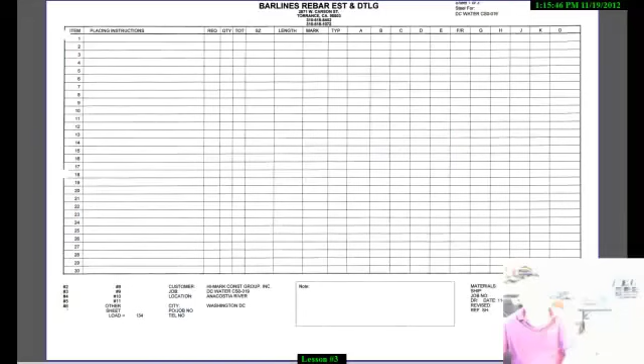We're now ready to go on to hands-on rebar detailing. Here is a detailing form that we used to use 40 years ago, before the advent of personal computers. All our detailing was done manually. We will write the descriptive items here, line by line. We will have columns for quantity, sizes, lengths, mark, type of bend, and then the dimensions A, B, C, D, and on and on.

We practically invented all the terms that you see now, like EF, each face, near face. When we're facing a wall with a two-curtain wall, the vertical bars closest to us we call vertical bars near face, and the vertical bars away from us on the back side we call vertical bars far face.

So we invented most of those terms, and as I go on and teach you and demonstrate how I do rebar detailing a long time ago, I will slowly describe what those terms we invented mean. So our style is descriptive.

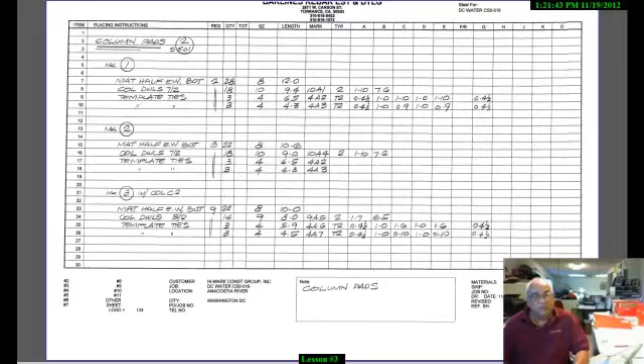Mark 1, the mat rebar, the column dowels, and the template. And he already knows how to install them, how to put the rebar cage on the column dowels. 7-2, 7 bars on the north and south face of the column, 2 on the east and west face. So by doing that, I don't need to make a drawing. That's it. So this is how we make use of this form sheet.

The detailers and the iron workers understand each other based on certain terms that both of us agreed on. Our joint collaboration practically invented those terms. The detailers and iron workers greatly utilize the contract drawing as their placing drawing. The detailer very seldom draws a placing drawing. If it's not covered on the contract drawings, that is about the only time a detailer will make a sketch.

As you learn to use Shear 97 detailing software, you will find similarities between this form and Shear 97. Most of the detailing software are based on this form. This is how it all began.

Doing detailing a long time ago, before computers, before calculators, handheld calculators, we used to use slide rule. And we learned, because we're dealing in imperial, we learned to calculate everything in decimal of a foot. We practically memorized the equivalent decimal of a foot.

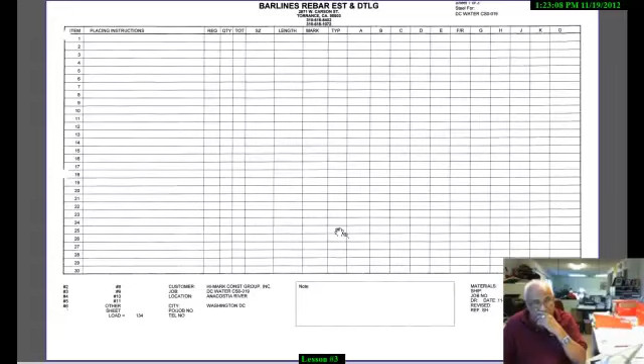1 inch, we already know, is 0.08. 2 inch is 0.17. 3 inch is 0.25. So if I'm adding 3 inches, I add 0.25 plus 0.25, it comes up with 0.5, which is 6 inches. See, all the rebar detailers memorize this in their head.

Now that we're using calculators, I still use this method immediately, rather than say 6 inch plus 6 inch divided by 12 to get the foot. Just by adding, using the decimal equivalent of a foot, I got my answer right away. So these are some of the things we invented then.

And now, showing this to you, we're going to go through the detailing of a foundation. But before we do that, I also like to show you my preparations when I begin a job.

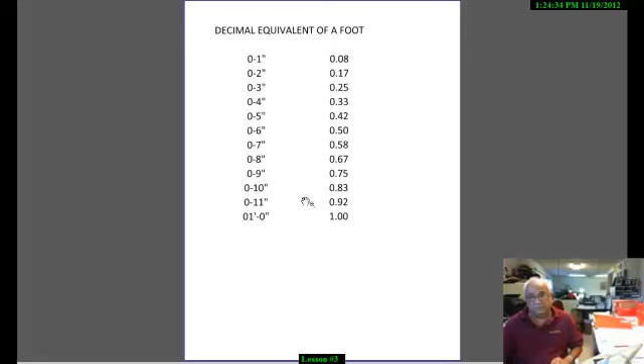This is a set of contract drawings. This particular job is the March Air Force Base Control Tower. When I begin my work, first I study the scope of work. I read through that, I read through the specs, and I determine whether the job is FOB or installed. Then I read the drawings completely from page to page. I go through it one by one.

Until I can build it in my head. I imagine building it in my head. I begin like I'm building it, from the very bottom of the structure, slowly going up and up until I practically build the whole thing. And as I'm picturing it, where the walls are, where all the foundations are - is there going to be a concrete wall? Is there going to be a masonry wall? Is the roof concrete, or is anything concrete? Is the floor concrete? Is it slab on metal decks?

I picture all that. I go to the architectural drawings, the mechanical drawings, plumbing, electrical. Are there any holes in the mechanical that will affect my rebar detailing? Suppose a pipe goes through a wall - what happens to my vertical? Do I need trim bars and all that?

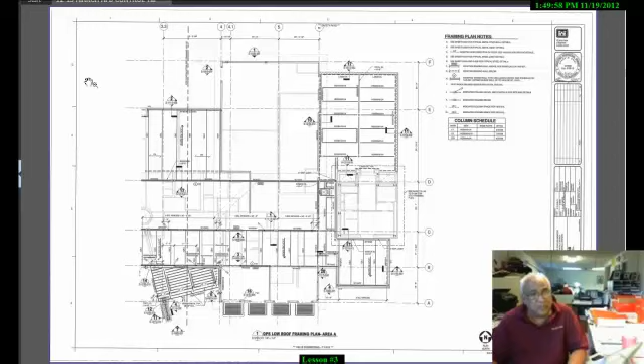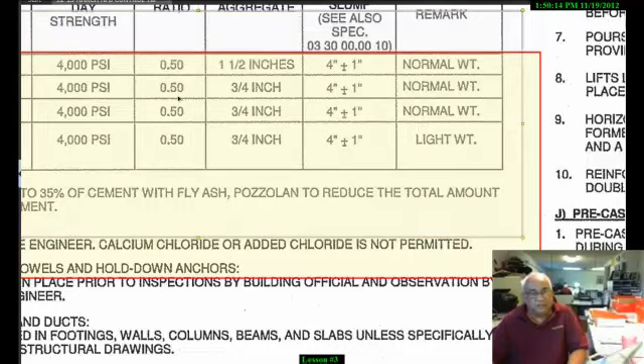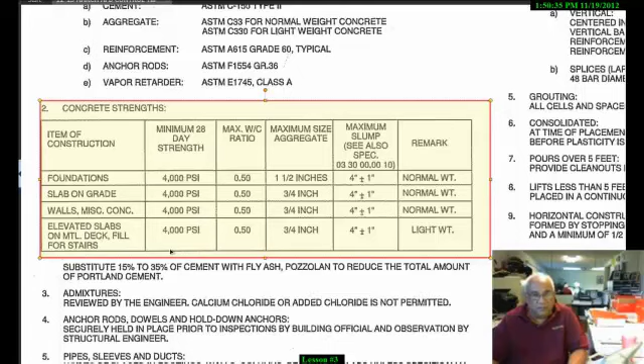So once I got this in my head and I want to go to the details itself, I check on the following: I check on concrete specs. What are the concrete specs on this job? I see it, they're saying in this job - okay, let's look it up - and it's saying the foundation is 4,000 psi, the slab on grade is 4,000 psi, walls are 4,000 psi, and the slab on metal decks are 4,000 psi. So I've only got one strength, 4,000 psi.

I need the strength to determine my lap splices, because lap splices are a factor of the strength of the concrete also. Then I look at, is it all normal weight? Because if it's lightweight, then I have to apply a certain factor to the splices.

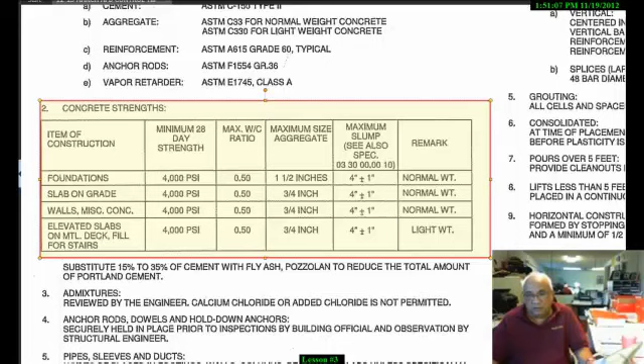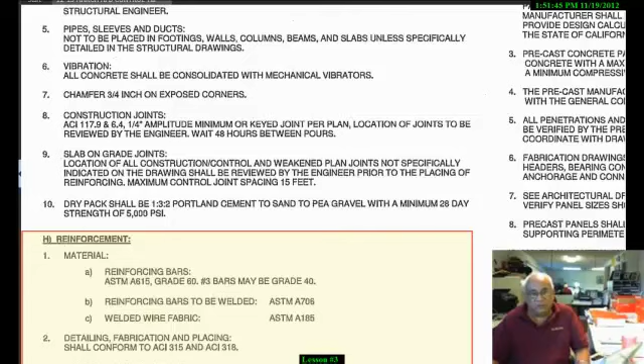Then I check the ASTM specs. You remember the ASTM specs? It's important, we need to know what the spec is. So I look and read through the general notes until I find them. In here it's saying material, reinforcing bars, ASTM A615, grade 60, and it's saying number 3 bars may be grade 40. So if I like to, I'll say okay, all the number 3s are grade 40, the rest are grade 60. If the bars are going to be welded, they want A706. The welded wire fabric is a standard, ASTM A185. And they're saying detailing, fabrication, and placing shall be according to ACI 315 and 318.

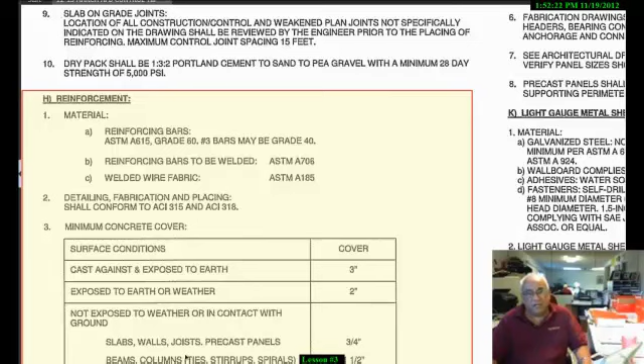I look, and then I check on protection - concrete clearances. Cast against or exposed to earth, 3 inches. In other words, all my foundation, if the rebar is going to be laid on earth, I have to be away from dirt 3 inches. If it's going to be exposed to weather - it's formed, but once they remove the form, it's exposed to weather - it has to have a clearance of 2 inches. Not exposed to weather, for example underneath the slab, or inside of a wall, inside base of a wall, 3/4 inch.

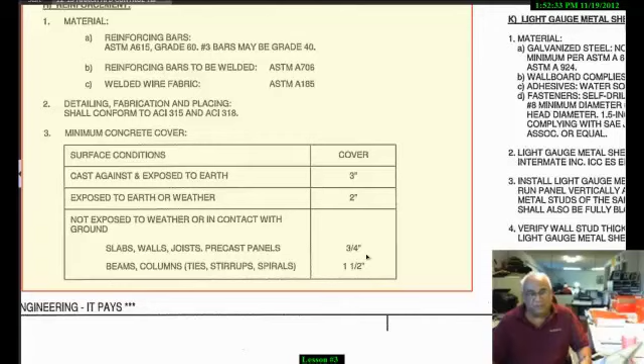Beams and columns, to the stirrups, not to the main steel, but to the stirrup or ties. It's 1.5 inches. See, these are what I need to do, and as I gather them, I copy them in a piece of paper.

All this information, I tape in front of me in my detailing station. That's why our detailing station has 3 side walls - you have walls so you could stick these items in, so you don't need to flip to the drawings, you look in front of you. Every time you're detailing, get a piece of paper and put the name of the job, and here are all the items I need. That way it's easy for you to look at.

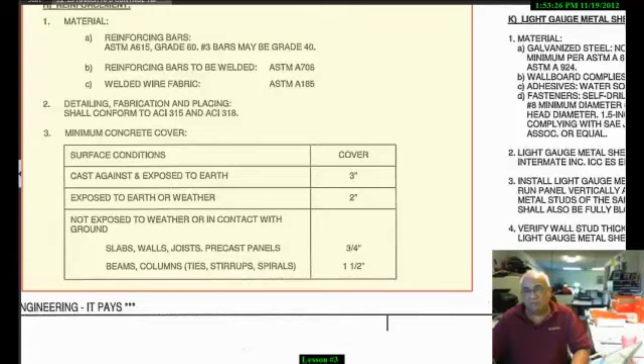Okay, so I go through all the motion of all this until I get all the information I need. I check whether there's rust protection - are the rebars going to be epoxy coated or galvanized? And I check the lap schedule, see if there's a lap schedule. If there's a lap schedule, I copy that lap schedule. And I look for other requirements for laps.

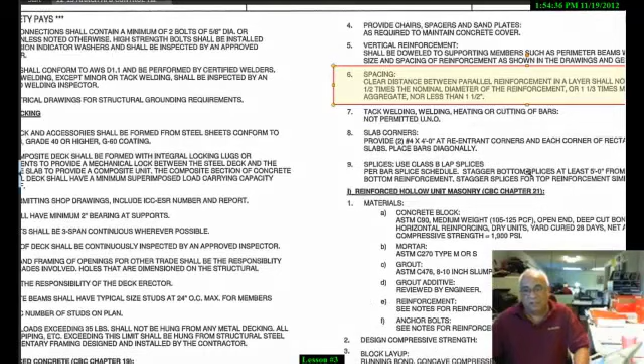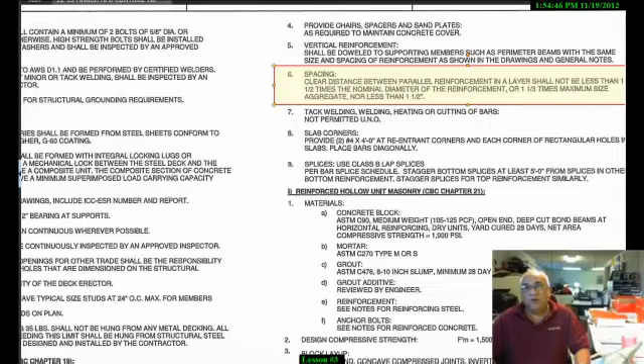Like in this case, there is a special requirement for lap. Let's see what this is, let me enlarge it. It's got this special note. It says spacing, clear distance between parallel reinforcement in a layer shall not be less than 1.5 times the nominal diameter. So it's got that thing.

Splices, like this one. Splices, let's highlight this. Splices, you have to use Class B lap splices. Lap splices per bar splice schedule, stagger bottom splices. So there's a requirement of staggering them.

You cannot have splices all at the same point, so you have to stagger them. So if you have a series of bars, make sure your last bar and your beginning bar are not the same. This way they could stagger them by flipping the ends on each side. You could stagger a series of bars by alternating ends - you put one end on one side, and next time you put that side on the other end. But make sure the end bars are not the same. If you make them the same, they won't be able to stagger anything.

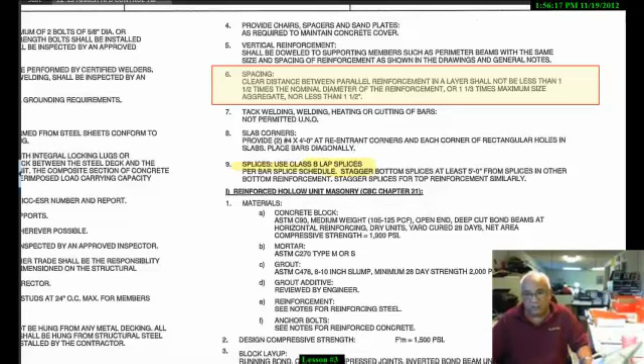Concrete block, I check it out and I see. I look for something like open or close end blocks, and I will explain this later on when we're doing the masonry wall detailing. So anything that is pertinent to my detailing, I gather them, I put them in a piece of paper, and I put them on the board, on the walls next around me, facing me, most of them. This is how I do my preparations.

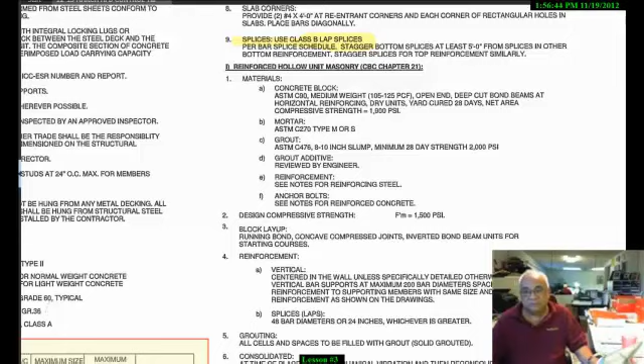The lap splice schedule on this particular job shows 2 categories: top splice and other splice. The top only pertains to horizontal bars, not vertical bars, just horizontal bars with 12 inches of concrete underneath it. Others apply to vertical bars and also horizontal bars that doesn't have 12 inches of concrete underneath the bar. So that's the difference. A detailer should know this very clearly.

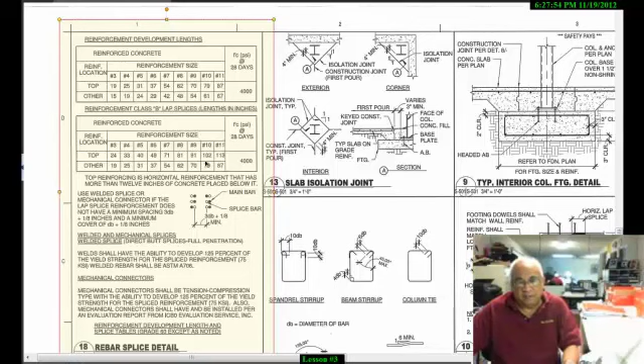We are now into the specifics of detailing foundations. We begin, of course, with the first item of foundation, usually the deepest concrete. It is usually the drilled piers or caissons if they are present in the job. Then you climb up one item at a time into column pads or pile caps, then into grade beams or tie beams, and sometimes you have to go into a mat foundation. All of these are foundation work. Slab on grade is part and parcel of the foundation work also. So we begin with the caissons, and I will demonstrate to you the way I used to do caissons using the manual descriptive detailing style that we used to do 40 years ago.

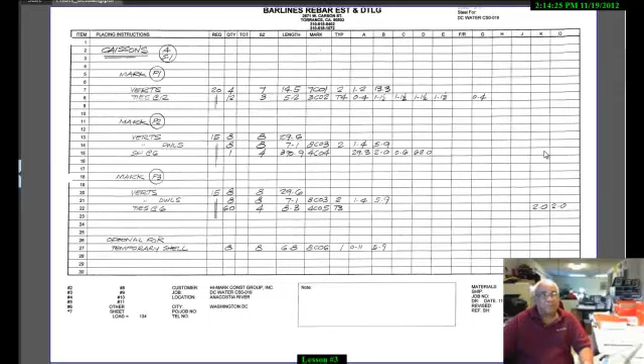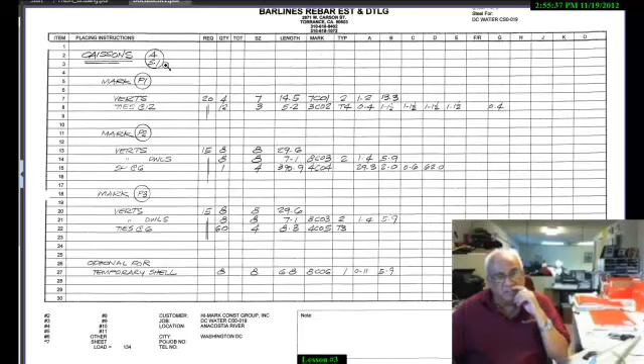Here's how I used to do caissons 40 years ago using descriptive detailing on a form sheet like this. Everything is done manually. I reference the detail on the caissons using the contract drawings, in this case A-S1, that's the actual contract drawings.

And I use the same markings on those caissons or drilled piers, P1, P2, P3. If I have a series of P1 and some are different than others, I will distinguish them by putting a subscript, P1A, P1B, P1C. But they're all still P1 based on the contract drawings. I will never change the markings on the contract drawings - that will just confuse everybody. So I will use the same marking. Mine might have a subscript, however, might have P1A, P1B, or P2, P2A, and so on.

In caissons, the items are usually a vertical bar, maybe a vertical dowel, and ties, spirals, or hoops. Sometimes I will supplement my detailing with a drawing, but first and foremost, I finish all my detailing first. I gather all my P1, get all those items like lengths and all that, and I'll put verts, which means the vertical bars.

I have 20 of those P1s. I'll put 20, and underneath I will do a double line which denotes ditto, meaning this next line is also 20. I will put on a quantity. In this particular case there's only 4 vertical bars.

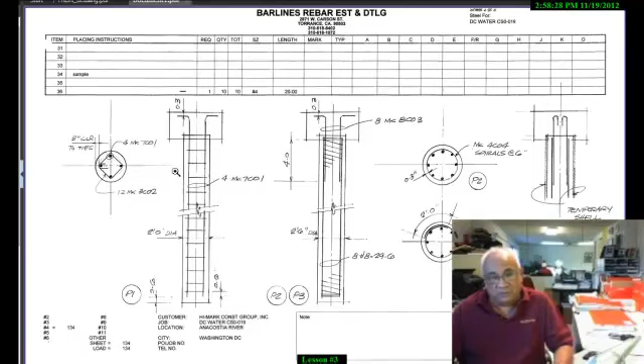But that's not what I use. I use a type T4. T4, if you look at your standard bend, is a diamond tie.

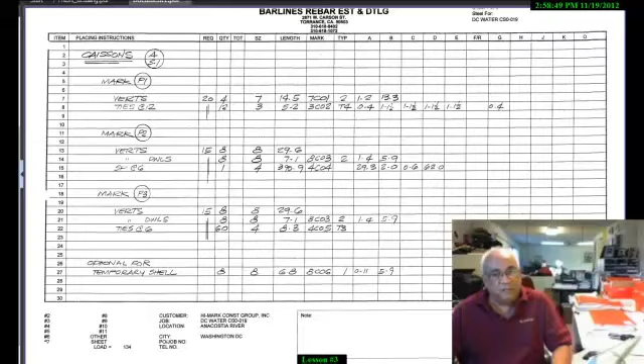T4 is a diamond. We use a diamond because we don't really know the BCDE. The BCDE is rounding up at the corner. It's not equivalent to the hypotenuse of the height and base. Sometimes detailers, because they know the height and base are the same, tend to assume it's a type T1 and they use the hypotenuse.

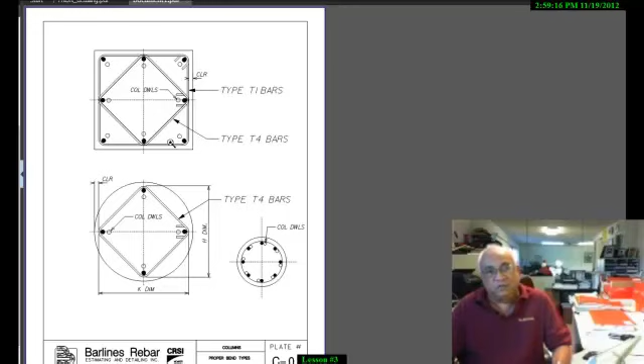Look what happens if you use the hypotenuse as your B, C, D dimension. If you happen to use that BCD dimension, which is the heavy lines inside, your clearance is 1.5 in this case. You see that point to this point - that would be your hypotenuse of this base and height. But you notice it's narrower than the actual BCD. The actual BCD, because it's rounding up at the corner, enlarges the bar, so the actual tie is about 2 bar diameters wider.

We had a detailer, a smart detailer from USD, who had several caissons, like something 30, with 4 number 8 bars vertical. He made a mistake using a type T1 for the ties, and because he's a smart kid, he right away said, 'Oh, I know the base, I know the height, I can use the hypotenuse.' So the BCD is the hypotenuse. It was too narrow - they weren't able to use it. We had to buy a new set of ties for all of those piles.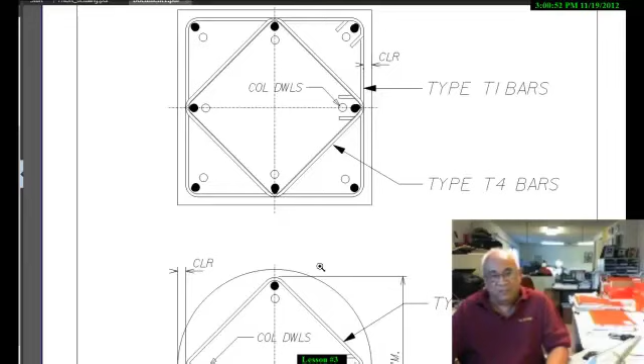Because it's not a type T1, it's actually a type T4. Remember that, it's a diamond tie. A diamond could be looking like a square, but there are occasions where if you use it on a rectangular column, a diamond would be looking like a diamond, not like a square.

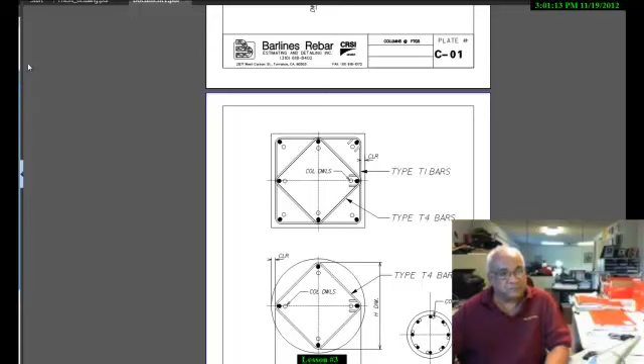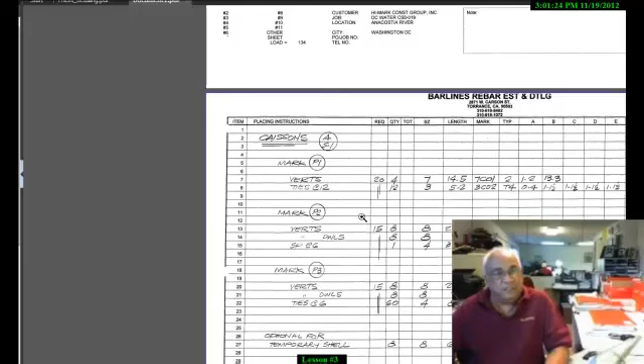So going back to my detailing, even then, I was smart enough to know that I could not use a type T1, I have to use a type T4. The other thing I recognized at that time is to make it easier for my iron workers, I need to show them where to begin those ties. I need to tell them exactly where to begin spacing. So on my drawing I said, begin the first tie 6 inches from the end of the vertical bar, and then spacing, and so on.

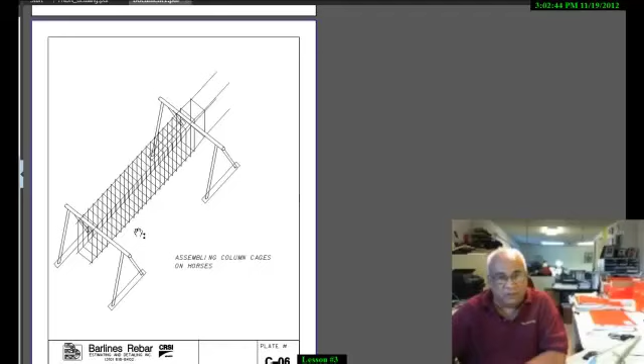I did this because I recognized that concrete is not available to them, and I should not be referencing the concrete, because like columns, caissons are built using horses like this. So they put the vertical bars on horses, and then they hang all the ties, and they insert some more vertical bars, and then they begin to tie all of them. They begin to assemble them into cages way out of the hole where it's going to be dropped. So in a certain part of the job site, guys are busy building them into cages. So do not be referencing concrete, because the concrete is nowhere in sight. Reference the end of the bar.

This is true on caissons and columns. It's built on horses. Okay, to continue on.

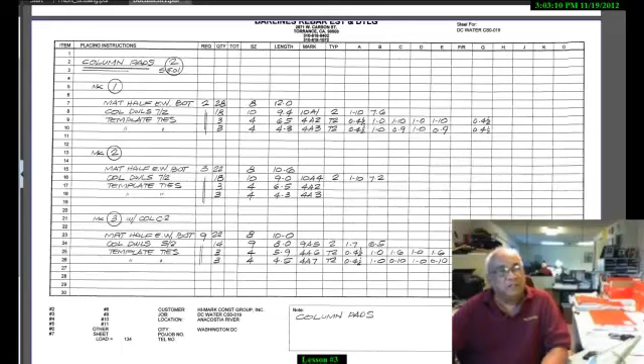Then I have type 2, that's column pad. I have a Mark P2 caisson. The vertical bar is number 8, 29'6", a straight bar, and at the top it's got a dowel, 8 number 8, 8CO3, type 2, 1.4 by 5.9. It's a dowel, like this. It's got a vertical bar and dowel at the top.

And then I have a spiral. A spiral is written a long time ago like this, and it's still written like this. But you now have some tools to help you, while before we didn't.

I put a bar mark on it. I use this sequence that is already available. I never start a sequence again just because I have a different size bar. If I do that, I'll have a hard time keeping track of where I am. By doing this, just going by sequence, 7CO1, CO2, CO3, 4CO4.

The first dimension I need, the A dimension, is the height of the spiral, from the bottom of the spiral to the top. The second dimension I need is the diameter of the spiral out to out, in this case 2 feet, because the caisson is 2'6", 3 inches clearance on each side gives me 2 feet. The third dimension I need is the pitch or spacing, 6 inches. The last dimension I need is not really a dimension but a count. It's the number of turns.

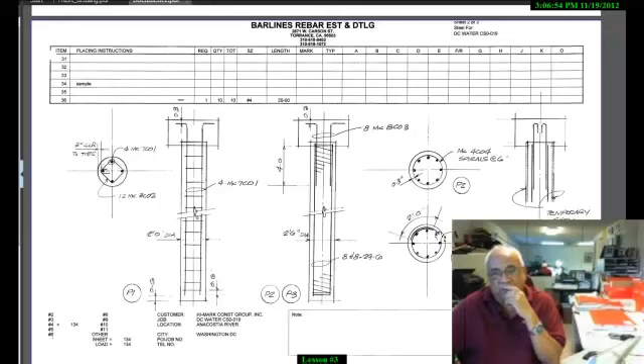Then I have Mark P3, which is the same thing, vertical bar and a dowel, but this time they're using hoops. The hoops is type T3, so hoops is just type 3. That's easy. The length is the circumference plus the lap, 2 feet. That would be the thing. And you get the number of bars by dividing the height by the spacing. That's how I come up with that.

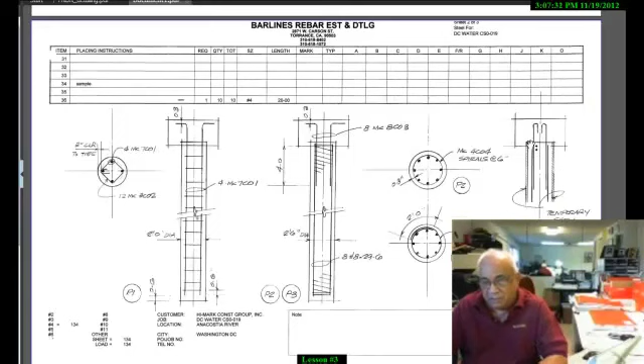Okay. When detailing caissons, keep a lookout for places where they may need to use temporary shells, temporary shells or casings. I think I made a drawing for that. Sometimes they put a temporary casing around the caissons to protect it from dirt caving into the concrete, caving into the hole.

Sometimes the dirt, that's why they have caissons, is very poor and loose. So if they do not have these temporary shell casings, then dirt could fall in and mix with the concrete or remove the holes they already dug, already drilled. In cases like that, make sure the dowels is not a 90-degree bend but a 180-degree bend inside, because these temporary casings are temporary. After the concrete is set, they remove it by pulling it up and using it over again. They use it over and over again.

Sometimes they may have only one casing for the entire job, or maybe 1, 2, or 3 casings. But they're reused, they're not left there in place. They don't need to. So because of that, make sure your bars at the top are bent inward rather than outward. That's the thing there.

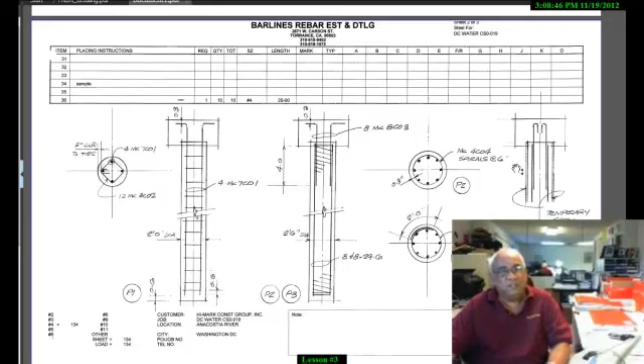One thing you will notice also, when I'm doing my detailing, I leave out the total. A long time ago, 40 years ago, we used to have what we call order writers.

We have a bunch of girls in a room, and we give them the order. The first thing they do is the multiplication, and their job is to make tags. The tags are done manually. They have several color tags, and they put on these tags.

Then they have a Friden machine, which is a manual machine, and they do the calculation to find out the weights. And they write the order on a bar list sheet, and that's what they send to the shop.

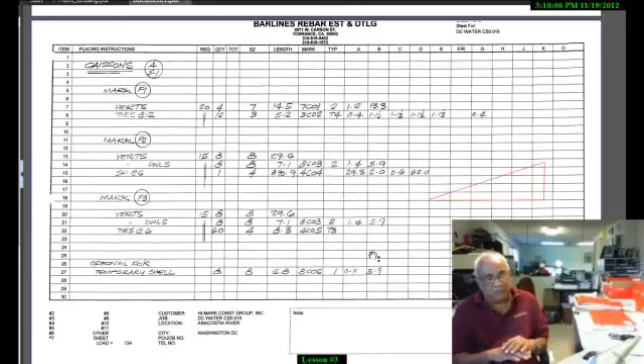So we have a bunch of order writers. The order writers now are gone. There are no order writers anymore, because as you're detailing it, you're creating a bar list, you get the dimension, and because it's a digital computer, the files that you create go to a machine. The machine will spit out the right number of tags, depending on how many pounds you want a bundle to be. This is all done automatically.

It's much safer now, much. The weights are accurately done. The girls sometimes made mistakes on the weight. That never happens now. But still, the format that you use will still need to be like this.

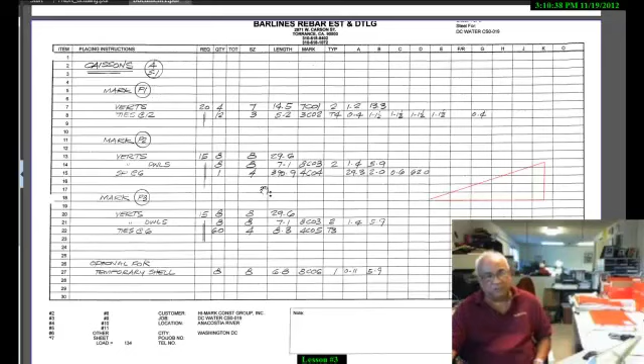You group them so that the iron worker will know exactly what set of bars he needs to collect and gather close to P1, what set of bars for P2, what set of bars for P3. You never mix them. And always your multiplier on sets, number of sets, has to be true to a set: 20 set, 15 set, 15. That way he knows immediately how many cages he's talking about.

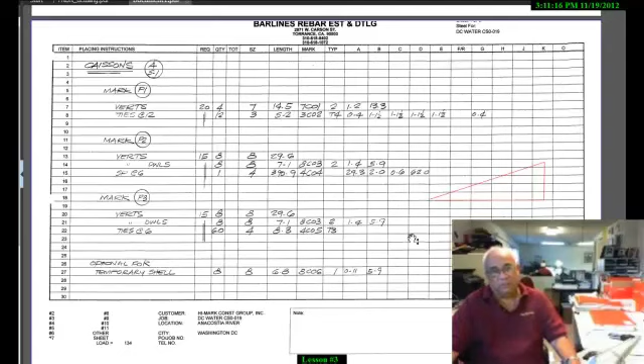In my case, because they still do not know which one is going to be a temporary shell, I prepare those dowels already. At the last minute, when they say P3 is going to have a temporary shell, I could immediately erase this and replace it with 8C06. That's how I do it. That's how we do caissons.

The next item I'm going to show you is how I do column pads, again based on the old style 40 years ago, same thing as the caisson. For column pads, I call out the section on the drawing, detail 2, in this case S5.01. It shows the detail of column pads. Column pads are pretty easy, and column pads and pile caps are somewhat similar. The only difference is most of the time pile caps have bars on top, but otherwise the detailing is fairly the same.

Let me call this out. I use the same marks as on the drawing that I have, and if I have a series of mark 1 with a slightly different configuration, I might add, just like on the caisson, a subscript like 1A, 1B, 1C, but I still maintain the bar marks from the drawing, like bar mark 1, bar mark 2. Changing the bar mark from the drawings will only confuse everyone.

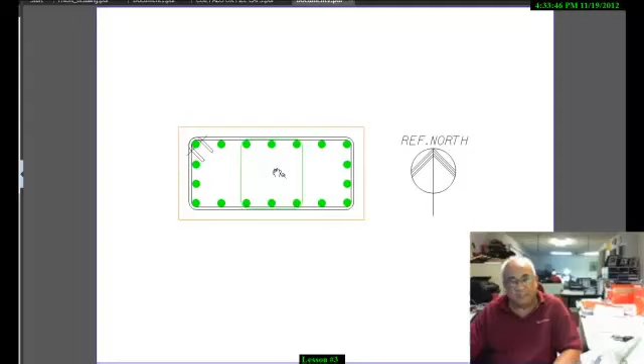The ties, the template ties I have, are one closed tie encompassing all the bars, and another intermediate tie to hold these 6 bars in a certain fixed location. It's a dowel, and I need these bars, the ties, to be a template tie.

Going back, I will have template ties. There's 3 template ties. They're all number 4. I usually use the same size bars as the actual tie. The template ties are usually not shown on the contract drawings. What is shown is the actual tie, and I will use the same size. And I'll have a type T2. The type shown on drawing will most likely be a type T1, but for template, I'll make it easier for the shop by using type T2.

Type T2 has 90-degree ears rather than 135-degree ears. 135-degree ears might get in the way of the dowels when they're so close together. A type T2 won't have that problem because it's 90-degree. So because it's just a template tie, I sometimes will use a type T2. I could use type T1, there's no problem with that, but I'm so used to helping the shop because T2 is easier to bend than the type T1s.

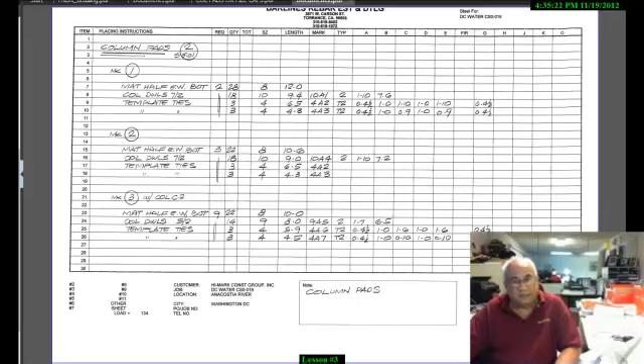And then my intermediate will be the same, but with different dimensions. A column pad is like this. You have a box, you have a mat, so many bars one way, so many bars the other way, and the column. These are columns.

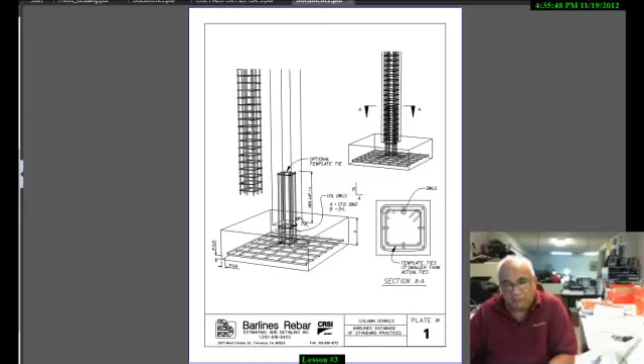The columns have to be set in such a way that it doesn't interfere with the actual column cages as it's being hoisted down into the top of the concrete. So the configuration of the dowels are like this. They're set inside in a concentric manner from the actual position of the vertical bars.

It's inside, and a template tie is used to hold it in place. Without a template tie, the ironworker will have a hard time placing those bars. The template tie, one at the bottom, one immediately below the top of the concrete, and another one to hold the top. This top one sometimes is taken out before they hoist the column verticals. If you have those template ties at the top, you won't be able to hoist it down because the ears of the ties will get in the way.

So here the template ties have 135-degree hooks. I could make them T2 by making them 90. The dimension of the template tie is based on the distance of these corner bars. The corner bars, all the bars are made the same way.

You notice that the corner bars have more H dimension, which is the offset dimension if you're detailing the column, than the inside ones. The inside one has only a very short H dimension, while here it's a long H dimension. So when I'm detailing this, I use this and then I lay out my template tie.

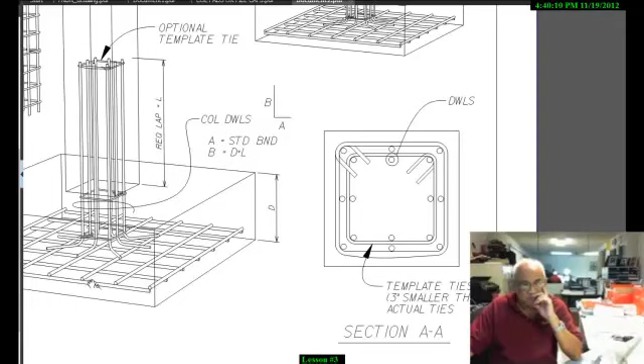And again, the spacing of the bars is from the Manual of Standard Practice. I use that, if you remember. And this is how it shows. You could send 2 template ties or you could send 3. I have a habit of sending 3 because I know 2 will be inside the concrete and 1 will be outside, and that outside one is thrown away.

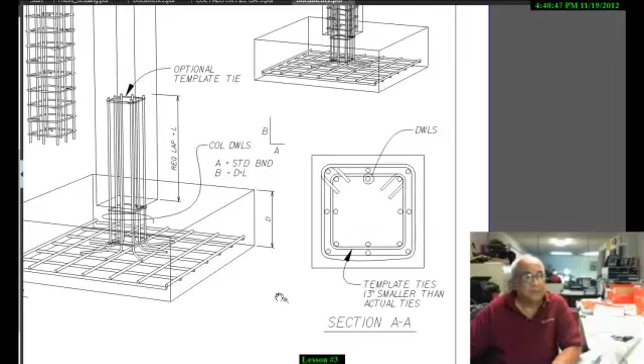The clearance of the template tie is just like so. You have enough space between vertical bars and vertical bars, and that would be the proper size of your template. So column pads are easy.

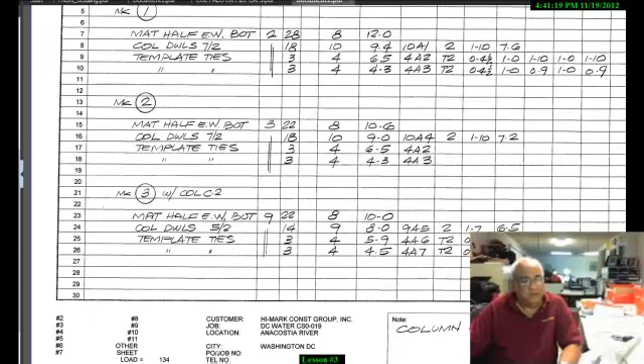Pile caps are somewhat the same. On mark number 2 pads, I have the same thing, mat half each way, the dowels, and then I say also 7-2, 5-2, which means 5 on the north and south face, 2 intermediate, and this is it. So about the only thing you need to know about column pads is you need column dowels and the template tie. When this is a pile cap with the top layer of mat reinforcing, do not forget to use standee to support the top mat.

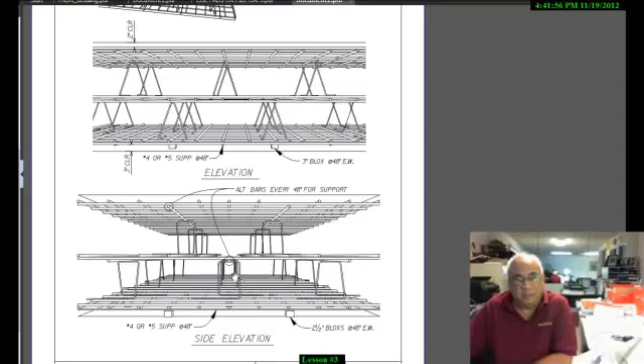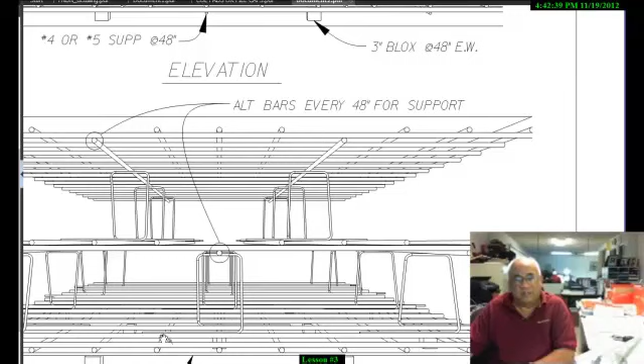You should have enough dimension here for bars to be tied to. If you round it up, the bars might fall off, so you need to have a little bit of a straight edge. Make sure the base of your standee is enough to go over 2 transverse bars. If you only had it one, it will fall off. It has to be laid on top of 2 bars—2 bars here, 2 bars on that leg, and 2 bars on this leg.

This is a type 25. There's another type, but this is most common for column pads.

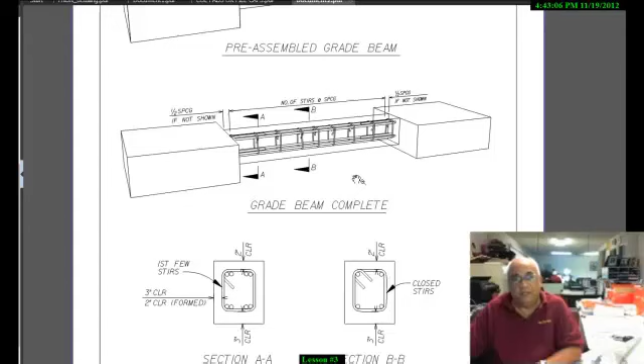If the column pads have tie beams that will be later poured in between them, do not forget to include the dowels. Remember, all bars belonging to the column pad when it's poured has to be included with the column pad. You cannot detail these dowels with the tie beam because the column pad will be poured first. Whoever gets poured first, anything inside it must belong to it. So when you're detailing the column pad, you have the mat, you have the dowels, and you have the dowels also for the tie beams.

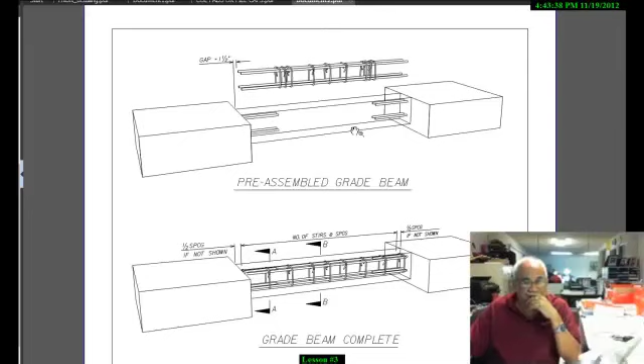Do not forget the tie beams. Do not detail them separately—they have to be detailed together. So here, if I had that condition, I will have another line that says tie beam dowels. That's for this.

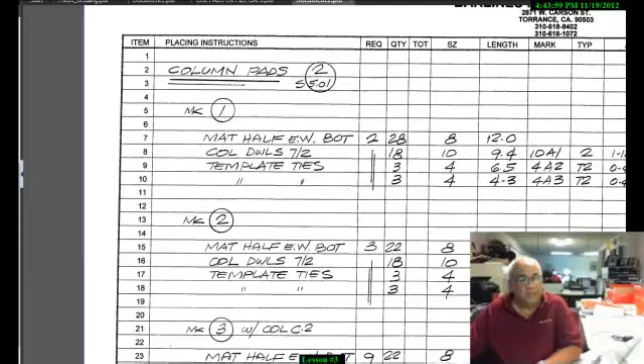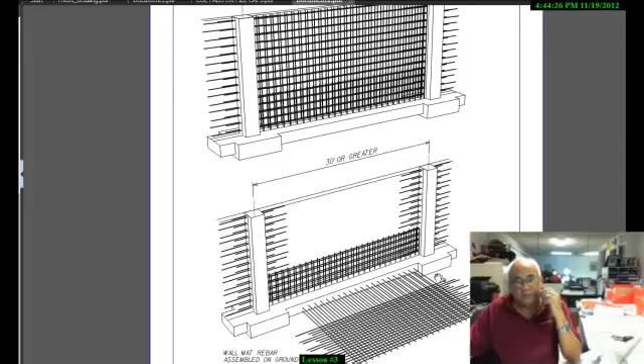The other thing, if you're detailing column pads, and there are column pads, you're detailing column pads—that's all you're detailing, column pads. The column pads are usually thicker than continuous footings. The continuous footings are usually shallower.

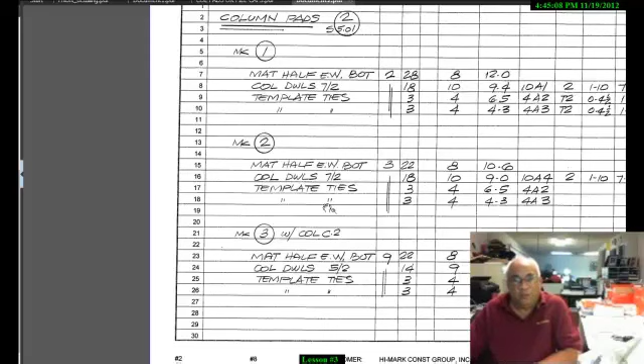Do not forget to include in your column pads those dowels that are going to be poured with it. In the event that they pour the column pads first before the continuous footing, the dowels are already in the column pad. So now, in my detailing, I will add a line for the tie beam dowels and another line for wall dowels, setting a few quantities of wall dowels on each side to take care of wall dowels when the situation is like this.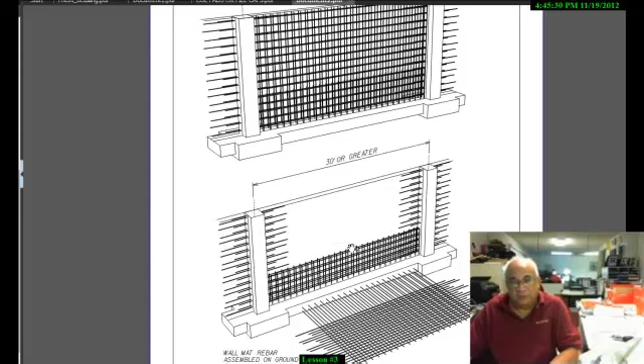Normally though, continuous footings and column pads are all poured together. And if they are, you could detail those dowels with the continuous footings as long as they go to the job site the same day. However, let me caution you, when you're detailing the dowels, those dowels are not the same—one is longer than the other. Remember, these two bars here will be longer because the column pads are deeper than the continuous footing. Take that into consideration. If you don't, your detailing is no good.

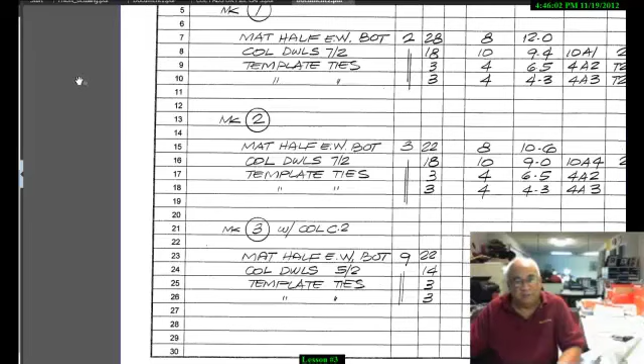See how simple column pads are, but it becomes intricate when you're thinking of template ties, when you're thinking of standees, when you're thinking of tie beams, and when you're thinking of walls. All of this has to be taught together because they're all part of the job. And the rule is, anything that goes inside the column pads or pile cap has to be included in the set—cannot be separated from the set. That is the rule of the jungle.

This might be a good time to make a break because this video should be pretty close to an hour now. The next lesson will deal with grade beams, tie beams, continuous footings, maybe slab on grade, and so on. Thank you very much. I hope you learned something.